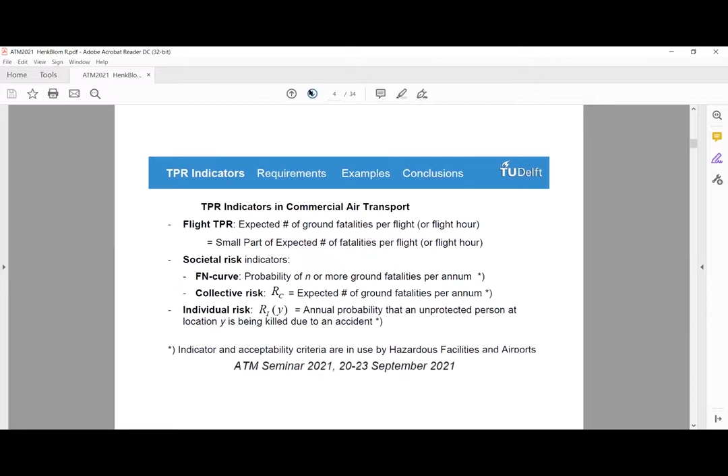It's important to see that the third-party definitions differ in some way between commercial air transport and UAS. In commercial air transport, third parties are people exposed for reasons unrelated to the flight, which implies the public on the ground. For UAS, it's the people not associated with nor deriving direct benefit from the flight, which means it concerns the public on the ground, but also passengers in another air vehicle. So if the UAS hits another air vehicle, passengers that may suffer from that in the other air vehicle are also counted as third party.

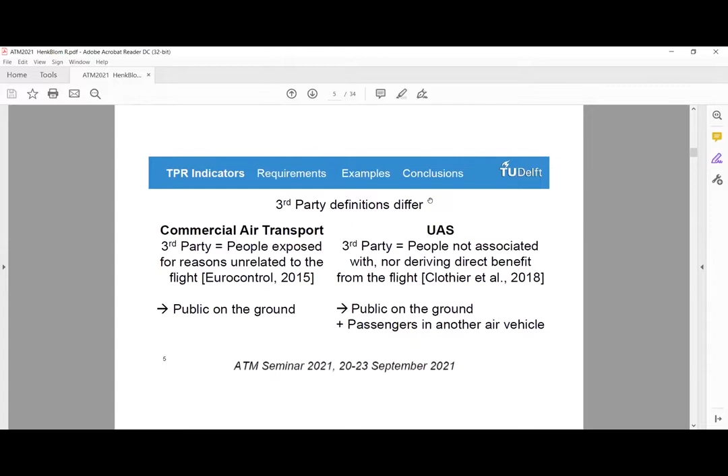Now, using this, we extend the TPR indicators from commercial air transport to UAS. And take into account that we only look now at the ground risk, not the risk that the UAS has on passengers in another flight.

So the collective ground risk per flight, I refer to this as the RC ground I from the ith flight. It defines the expected number of third-party fatalities on the ground in a given area X due to the direct consequence of the ith UA flight accident. You can also do it per flight hour by dividing this RIC ground by the duration of the flight.

I introduced these RI indicators, it looks complicated now, but it makes it easy later on. So now we define collective ground risk. That is the expected number of third-party fatalities on the ground in a given area X due to the direct consequences of UA flight accidents during a given annum. So we look at the whole year, like it's done for airports.

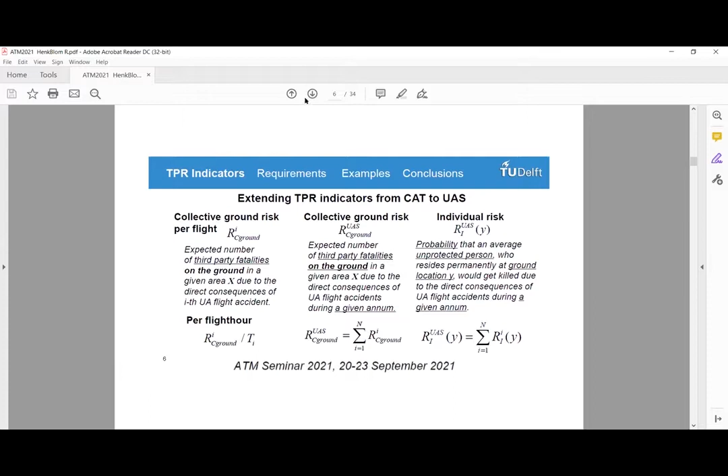Now let's look at the impact on the requirements, because you can always get things safe if you put higher requirements on the UAS operation. So first of all, we introduce acceptability thresholds for the 3 UAS TPR indicators.

In the UAS literature, they typically look at this collective risk for ground per flight, UAS flight, divided by the duration of the flight, and that must be smaller or equal to the criterion C ELOS, the equivalent level of safety. The C ELOS is then derived from how it is in current commercial operations, for manned aircraft.

For the collective ground risk, you must have this smaller or equal to the C collective ground risk, and this can be derived from the criteria used for airports and hazardous facilities. And for the individual risk, this one must be smaller than the C individual risk, which also can be taken from the regulations on individual risk for airports and hazardous facilities.

So it's clear that if you have these inequalities, these thresholds, they can be used to get requirements on the overall UAS system failure rate. I call it lambda E. That I will show you next.

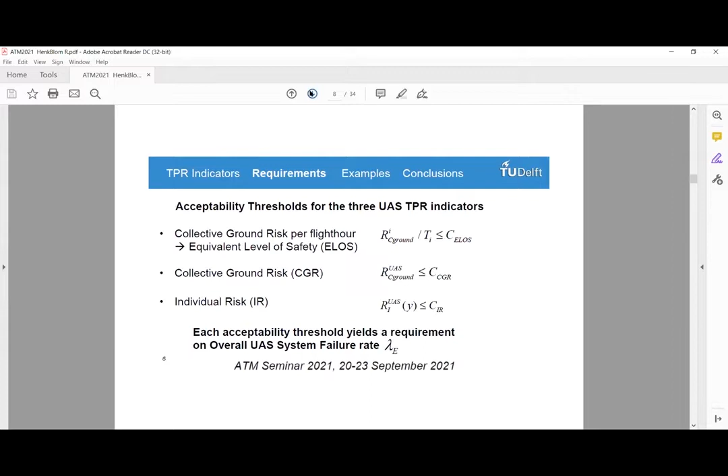So from the 3 ELOS, CCGR, and IR acceptability thresholds, we get requirements on the overall UAS system failure rate, lambda E. And there are 2 methods to do that.

One is to run a Monte Carlo simulation of a UAS operation, which has been addressed, including how to use the right models, in a recently published journal paper. We illustrated the working of it for a hypothetical UAS-based parcel delivery service in the city of Delft.

The second method is the analytical characterization for parcel delivery under model assumptions, and that is what the current paper in my presentation is about. So then you must make a number of assumptions.

One is homogeneity assumptions, for example a constant population density over the area you consider. These have always also been used by others before, like by Melnyk et al. in 2014.

Then we assume that the delivery area is a circular area around the delivery center. We have an expected number of parcel deliveries that is the same for each inhabitant of that area. The delivery flight follows direct radial paths out of the center and back to the center. And the crash center is uniformly distributed along the radial and Gaussian across the radial.

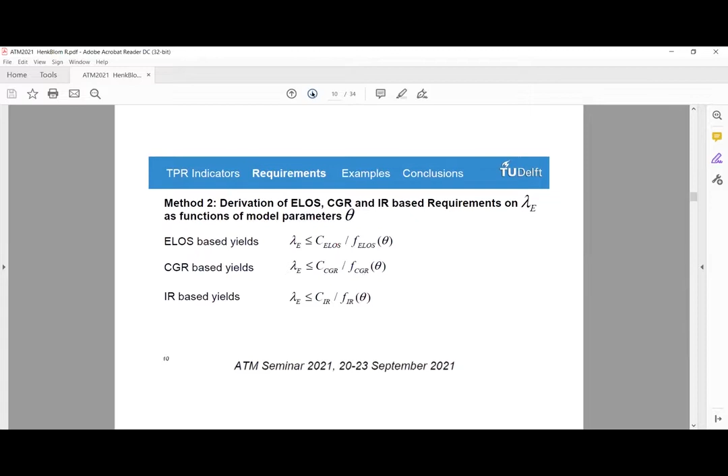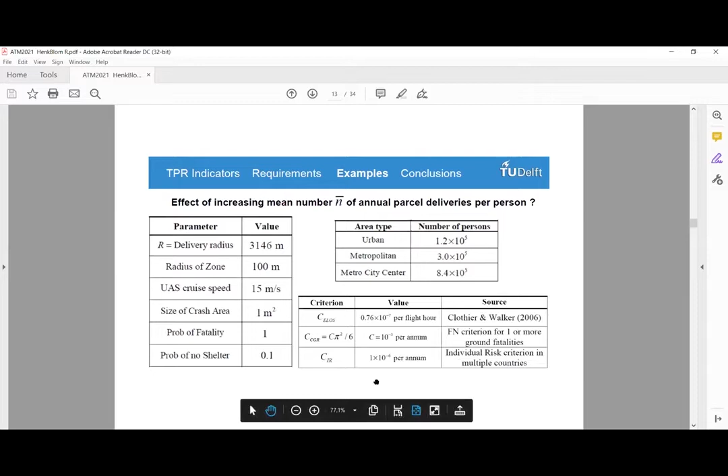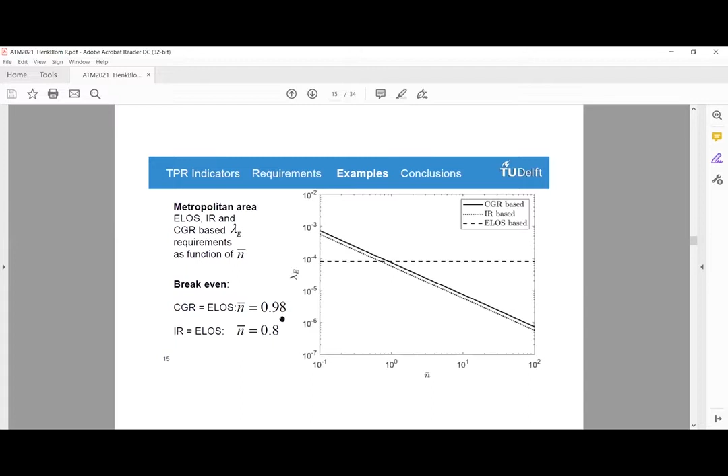Let's make another comparison. Assume that the ELOS-based lambda E requirements are posed through regulation on the UAS, and then slowly the number of parcel deliveries per year, the average, is increasing - first 1, then 10, then 100. Let's see what happens.

You have seen that the break-even point of ELOS and the IR risk is independent of the population density, so we can have the same results for any area type. Even from rural to metro city center, the next results to show always apply. The only requirement is the homogeneity assumption.

Now I also apply the Schiphol rules, interpreting them using the Schiphol individual risk criteria. If you are above the IR threshold, then no new housing developments can be done there. When you are within a factor 10 from the threshold, housing is stopped. And if you are in between, people that live there get no new housing, but they get a waiver to remain in their housing. So these are the rules applied to Schiphol.

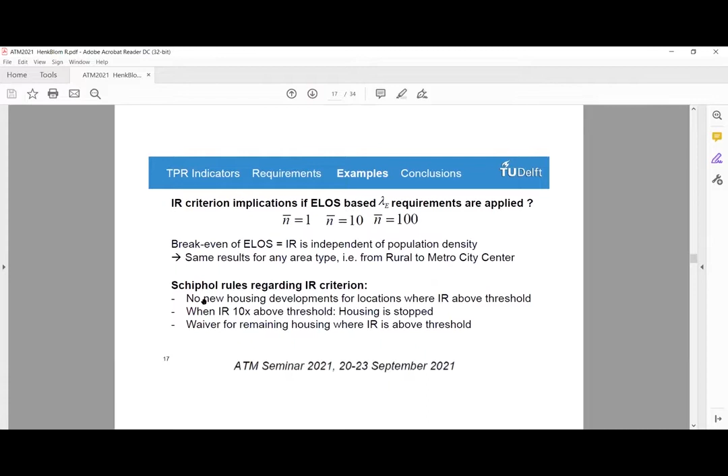Around Schiphol, if you apply these rules, it appears that the collective risk, the FN curve requirements, are also satisfied. So Schiphol mainly uses these rules together. Let's apply them now to the US situation.

We make an individual risk map for N is 1, so on average 1 parcel delivery per person per year, using the ELOS-based lambda E requirement. What do you get? You can look at the colors, but it's important to look at these circles in the middle. The smaller circle, only a dot here, has a radius of 14 meters. The larger circle, the only one not as a dot, has a range of 139 meters. In that case, 0.2% receive a waiver.

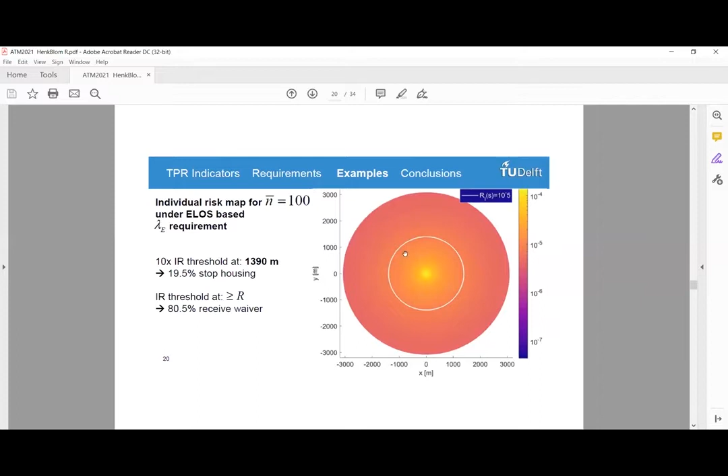If you go to the Metro City Center, for N is 100 parcel deliveries, then the whole area must get a waiver or even stop housing - 19.5% must stop new housing development, or rather, they must stop housing, so leave their house. Of course, in practice, this is unacceptable.

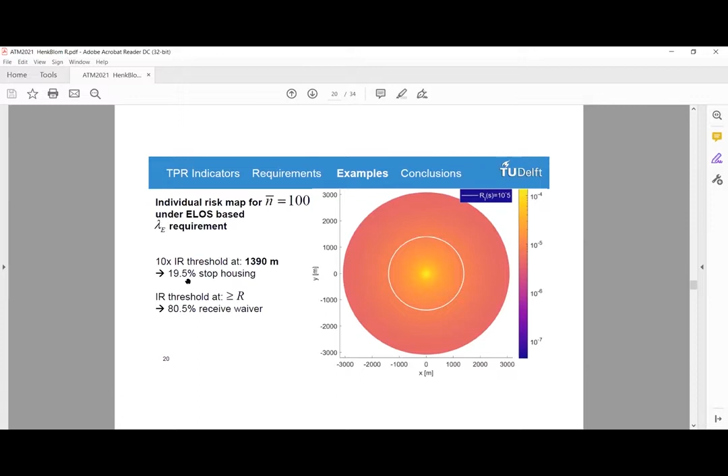Okay, let's go to the conclusions. There's an existing gap in societal issues in areas with more potential customers, and there are different ones - I only looked here at safety. In UAS literature, they have only addressed TPR from a flight perspective, while airports and hazardous facilities consider all annual flight operations. That leads to novel TPR indicators and thresholds for individual risk and collective ground risk.

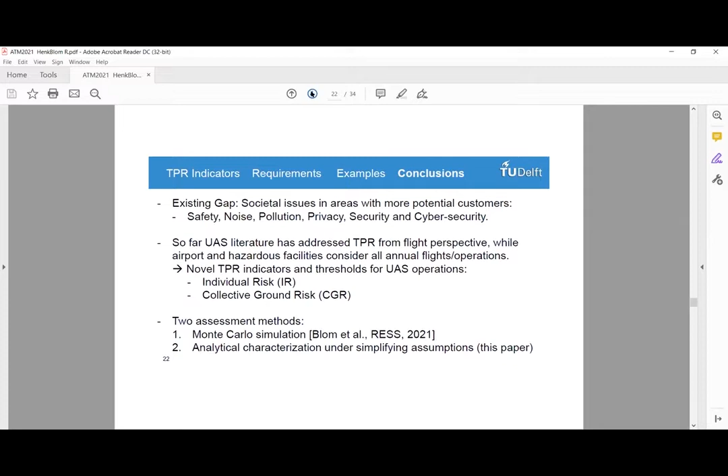We have shown there are two assessment methods: Monte Carlo simulation and analytic characterization. That analytic characterization was the subject of my talk now. We applied it to the last mile parcel delivery under 3 different requirements, with evaluated examples for urban area and metro city. You see that the break-even points are pretty low.

If you have under ELOS-based Lambda E and 10 parcel deliveries per person per year, then about 20% of the area has a too high individual risk. And if you go to 100, then the full area has a too high individual risk, and about 20% must even leave their house. So that would be completely unacceptable.

So the conclusion is that for a commercial UAS parcel delivery service involving many annual flights, an ELOS-based Lambda E requirement doesn't comply with TPR regulation that has been developed for airports and hazardous facilities.

There is follow-up research, for example, to incorporate and make explicit the ground risk of mid-air collisions between two delivery UAS, and delivery UAS with another UAS or low-flying general aviation. Then also extend the analytic approach to other types of UAS operations, for example flying taxis, medical drone services, to evaluate the TPR effects of advanced UAS support systems.

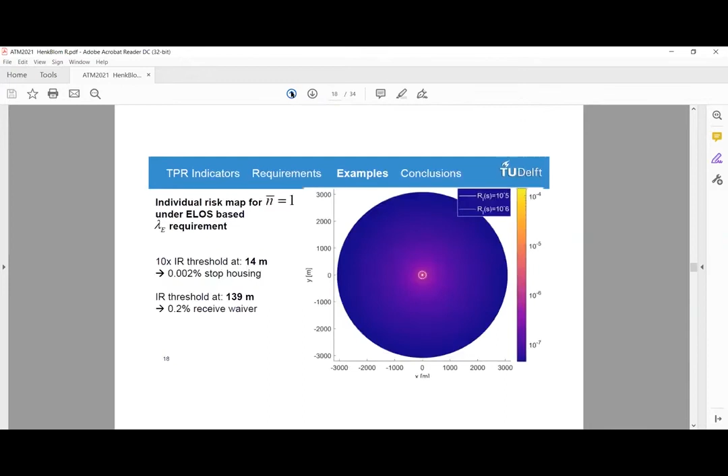These kinds of curves you can rapidly make with the analytical equations, and you can do it for all kinds of variables here. You can rapidly see what's the effect, and that's very helpful to do. If you would like to make these kinds of curves with the Monte Carlo simulation, for so many cases, it will take you a year or something. So it's very difficult to do that. That's the power of having analytical equations.

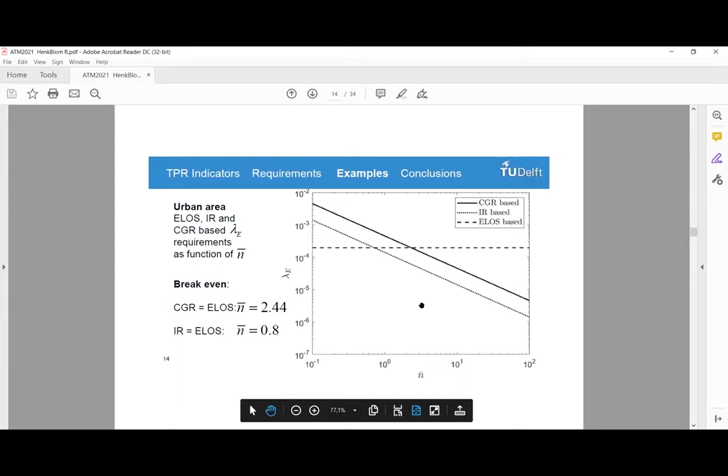Of course, then you must take into account that you have these assumptions. But if you know these assumptions, it's not so difficult to reason about it. And in particular, you can also say, okay, to understand it, let me run a Monte Carlo simulation where I do deviations from this. You rapidly can see, you get an impression of what's the effect. So it's not a big limitation, because you gain so much and you get insight so rapidly that it is impossible to get at that scale from Monte Carlo simulation.

I think you answered the question that was posted in the Q&A kind of in passing, where the question was to compare the strong points and the weak points of the Monte Carlo simulation as opposed to the analytical method that you've presented here. And I hear you say Monte Carlo is more precise because you can loosen some of the assumptions, but you run lots of Monte Carlo simulations that's quite numerically intensive and takes you a much longer time.

Coming back to your assumptions and the assumption of permanent residency that you assume for the individual risk, is this also an assumption for the collective risk assessment? And do you have a feeling for how much you overestimate the risk if you assume permanent residency?

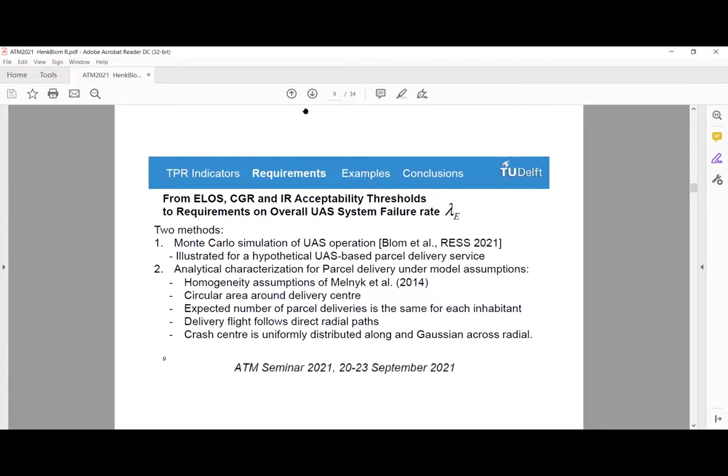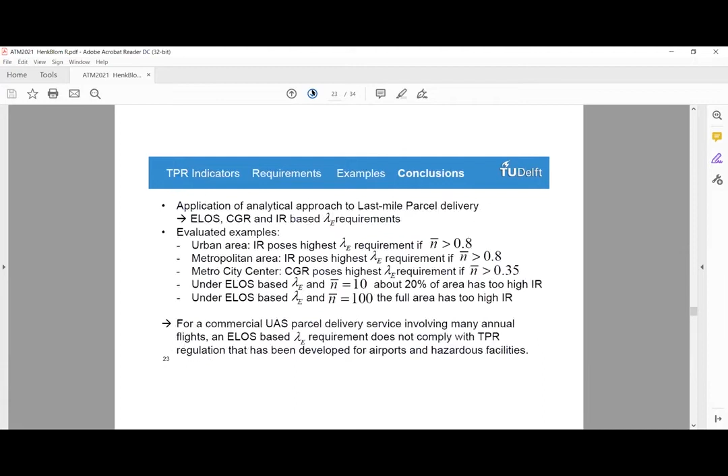The main thing I see is the follow-up, because once you start working on this for a while, you get insight into things where the submodels are currently weak. One of them is the probability of fatality. I've focused with another PhD student, and now continued with Shengpeng, the co-author of this, on this point, and we find really surprising things. For that, we use multi-body system models so you can exactly see where the drone hits the human, which can have a lot of influence on the probability of fatality.

And is the geometry of the drone, how are the assumptions taken into consideration? Because the size and mass of the drone, and its behavior, will have an impact on how likely it is that somebody on the ground is hit, not only the population density but also the pure mass of the drone. I assume you have to make certain assumptions there. For this probability of fatality model, developed with another PhD study, the drone is well modeled in a multi-body system model, so all the different parts of the drone are separately modeled.

And which assumptions do you make about the population of drones that will be flying? How many, or which percentage of class 1, 2, or 3, or how heavy are the drones? What's the distribution of heavy versus light drones assumed in your calculation? For the extension of the probability of fatality with the multi-body system, you are already happy to have a proper multi-body system model for the drone and the human per drone type. To have them all will take some while, that's for sure.

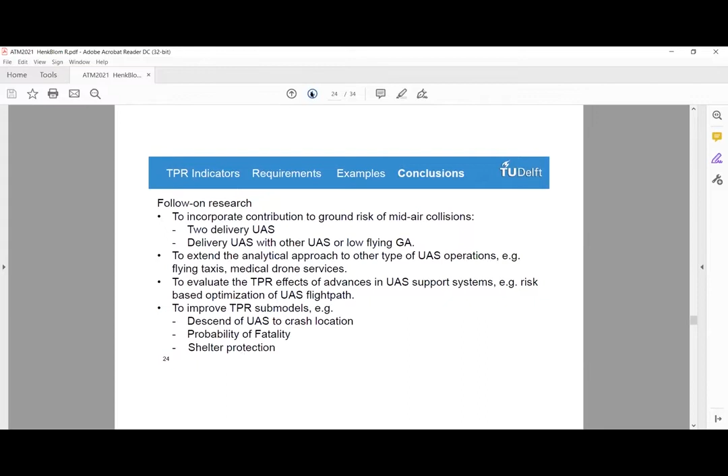That gets very complex. My last question, Henk, is which third-party risk indicators are presently used in existing regulation, for example EASA or the FAA itself? I have a few reserve slides and I can show you what I have here.

There's a table showing what EASA SORA is doing, EASA SORA for AMC APAS, then the FAA AC, the FAA order, and an SMS manual. If you look at the FAA SMS manual, it looks at all the types of contributions.

I can show you the fatality types. It has to do with whether you're looking at persons on the ground, fatalities on the ground, or persons on board, and also what type of accident - is it the UAS crashing to the ground, or the UAS hitting something else that then crashes to the ground, etc. There are many combinations; I can show you on a slide back, and there's also a paper we published 1.5 years ago, a conference paper. You see that the FAA SMS manual addresses all these cases, but from the single flight perspective, not summation over all flights in a year.

If you look at the specific developments at FAA for the US, you see that they focus only on the things on the ground, and not the other ones. In EASA, similar—you see the focus on this one, with something on board to take into account for the certified category, similar to how they currently certify commercial aircraft. That's pretty good. For light certified, the ground risk, they have special rules added for it. And for SORA, they also address this, but it's very qualitative—it's difficult to get a quantitative hold on what exactly it's doing.

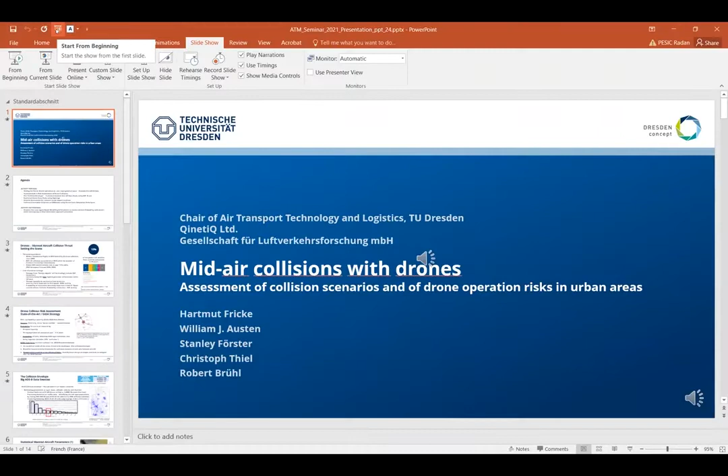Dear Mr. Chairman, thank you for giving me the word. My talk about mid-air collisions with drones is a joint work of TU Dresden, QinetiQ Limited located in Great Britain, and GFL, a university spin-off company located in Dresden. I have the honor to present this work on behalf of my colleagues William Austen, Christoph Thiel, and Robert Brühl. My colleague Stanley Förster will later join to present the use case findings.

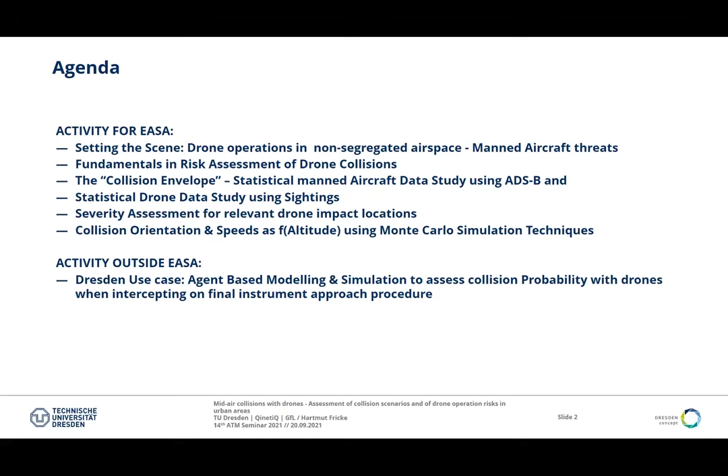This talk will be twofold. The first part covers investigations on drone collisions with manned aircraft regarding probabilities and severities of potential collisions, depending on the selected impact scenario. The second part uses our agent-based modeling and simulation environment from TU Dresden to apply the data generated in the first part to an urban use case scenario around Dresden Airport, where commercial transport operates in close vicinity to simulated passing drones. I should point out that the first part is an activity endorsed by EASA, the European Aviation Safety Agency, whereas the second is a TU Dresden-led research activity.

So let's set the scene. You may wonder whether the topic of collision risk with drones is really worth studying, right? One might think that drones typically fly at low altitudes, a few hundred or a thousand feet, so commercial air transport should generally be safe. But let's look into statistics—these tell us this is really a growing problem. In pre-pandemic times, global traffic performance was around 69 million commercial flights in 2019 alone, recorded by ADS-B data receivers.

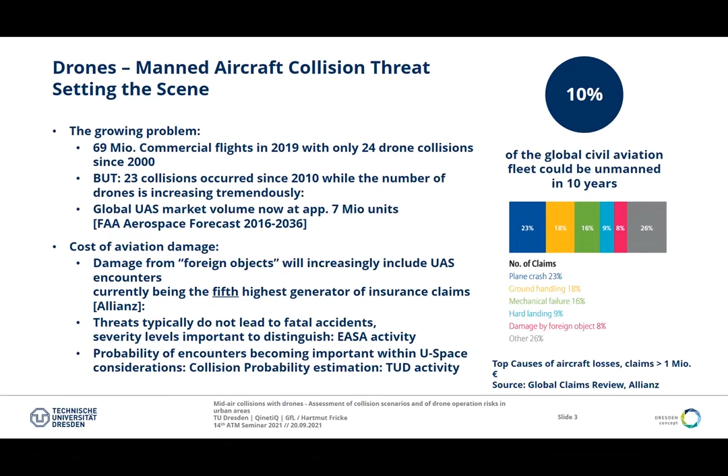Let's have a brief look at the state of the art in drone collision risk research. Basically, we can recognize that all research considers severity of drone crashes as what we call worst credible, clearly overestimating the computed risk. We do so far the same.

However, as for the probability, we found that all models rely on airspace capacity figures, a given throughput, and, if applicable, the applied separation between the flying units, following, for the case of aircraft, ICAO definitions, or if not applicable, in a VFR rule environment, using subjective linguistic variables like stand clear or stand well clear from each other, as we know it from VFR operations.

With the inauguration of a so-called drone collision task force by EASA in 2016, a set of recommendations came along calling for these missing model pieces, such as an analytical model of drone threats and a hazard severity threshold model to deepen the understanding of the effects of mid-air collisions between drones and manned aircraft. And this is exactly what this paper tackles.

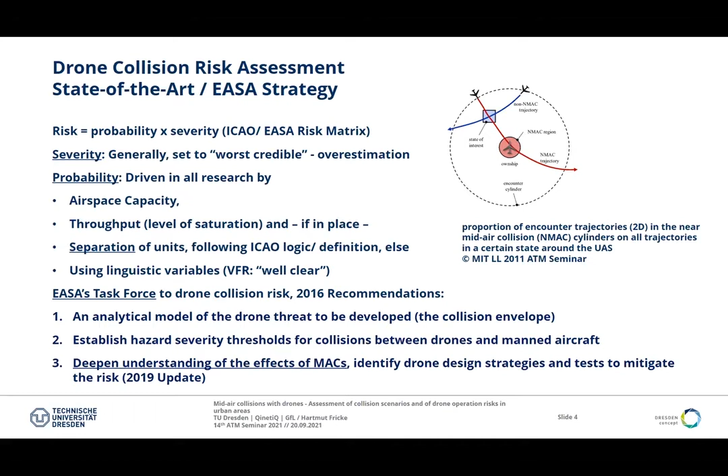On the right-hand side, this is just an excerpt of a typical encounter model, published in 2011 by MIT Lincoln Lab in the ATM seminar. Here, risk probability is calculated as a proportion of trajectories in the near-mid-air collision (NMAC) cylinders in all trajectories in a certain state around the UAS. So separation is the main driver of computing the risk.

To assess in detail the severity and probability of drone collision risk, we introduce the term collision envelope, concluding all parameters related to an impact. These cover, of course, typical kinematic parameters such as aircraft type, aircraft mass, operated altitude, speed, but also daytime.

This allows us to more precisely relate statistics to, for example, sunrise to sunset periods to reflect typical drone operation behavior, or, as we'll see later, scenarios where we limit wind speed and other factors. We will create scenarios at the end using these parameters.

The flight level 120 altitude boundary is considered to conservatively cover all typical consumer-prosumer drone operations and is based on statistical evidence. This vertical band was finally reduced to flight level 30 in follow-on activities, as our use case explores urban area safety considerations. But here we start with the flight level 120 band limitation.

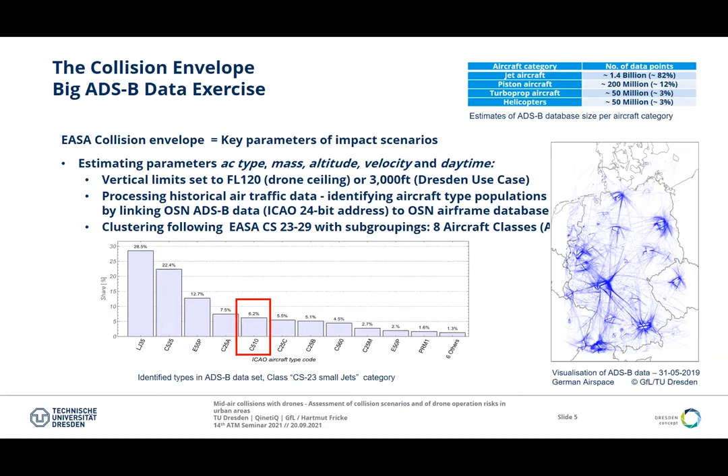ADS-B data contains the geometric altitude above mean sea level, as reported from GNSS sensors. However, drone operations are typically reported or related to height. So to derive the height above ground, information about the topography, the elevation, is required.

So we use a specific geometric algebra to identify the night and day shift times and located it to each grid point of the dataset.

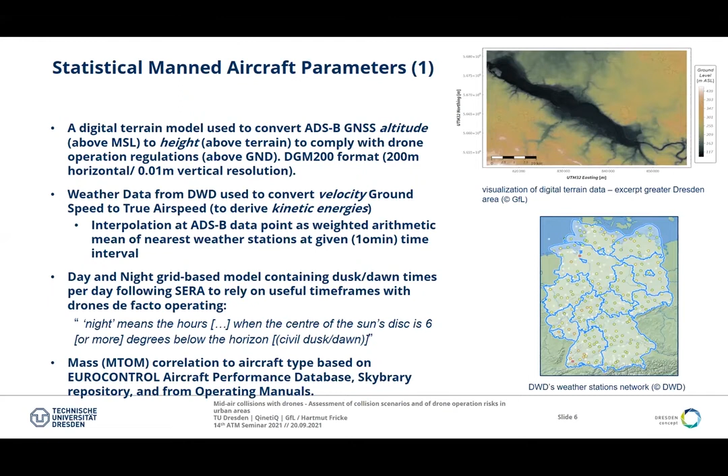To relate the aircraft classes and aircraft examples found in the previous step to the different speeds, we computed those for all 8 aircraft classes for a total of 30 randomly selected days, from which all data points were taken, but per aircraft class not more than 100,000 per day.

After the selection process, the GNSS altitude given in the ADS-B data was converted into height above ground for each selected data point using the digital terrain model, and the aircraft type was matched from the OSN airframe database using the reported ICAO 24-bit identifier of the onboard transponder.

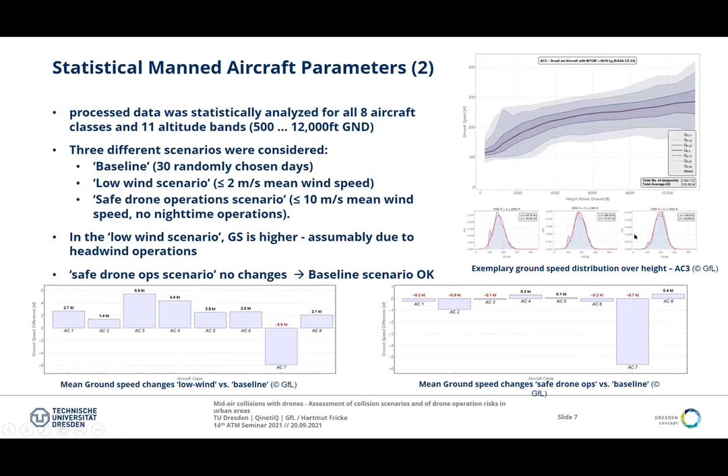For all classes, we can state that the statistical analysis showed expectable behavior for all 8 aircraft classes, with mostly increasing ground speed with increasing height or altitude and main aircraft size.

Now let us look at the drones. We described how the probabilistic distribution of aircraft ground speed was calculated as a function of altitude. This provides an evidence-based justification for the speed of different categories of aircraft during low altitude phases of flight, rather than relying upon generalized performance figures.

When considering near-mid-air collisions, we introduced already the term NMAC with drones, the relative velocity of the drone and the aircraft is the second most relevant risk trigger, obviously, dictating the kinetic energy.

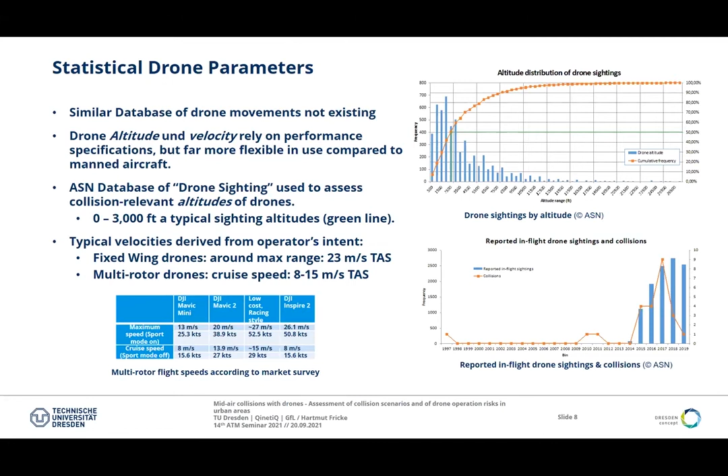So before doing another step, to compute the collision risk combined, we first check again the severity aspects of such collisions as introduced in the beginning of the talk. Local manned aircraft target identification, meaning where the drone hits the aircraft, will strategically involve finite element model simulations and testing of collision scenarios.

That's obvious, and this is going to be covering the next steps in the vulnerability program of EASA. But for the first hand, it would not be practical to consider impacts against all potential impact sites on each aircraft class, because this would lead to a huge number of possibilities. So we instead prioritized the local impact zones of interest, and a list of candidate impact zones like windshields, propellers, leading edges was created based upon outputs from EASA's Drone Collision Task Force and other studies.

For each example aircraft identified per aircraft class, as you remember from the first part of the presentation, these zones were then evaluated against criteria: the relative probability of the feature being impacted, the perceived vulnerability of the feature to impact and damage, and the criticality of the feature to the safety of the aircraft and its crew and passengers, through workshops and offline surveys.

The conditional probabilities assume that a collision has occurred and considered the relative probability of each of the candidate impact zones being struck. Vulnerability of the impact zones, and the ability to withstand an impact without failure, was based upon expert opinion and evidence, allocated to a 3-level determination process: high, medium, low.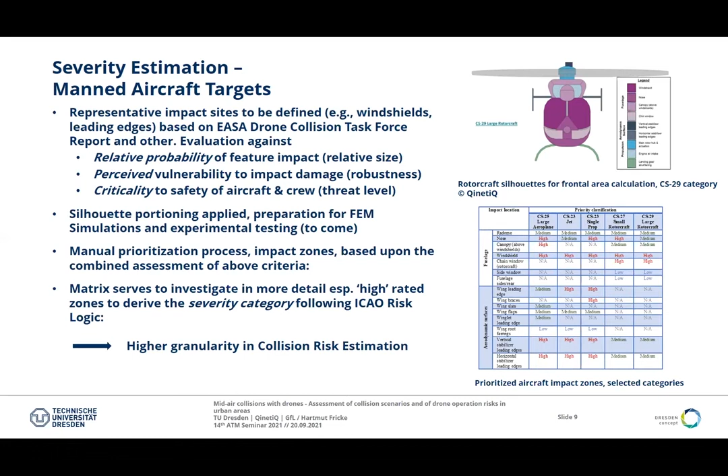With that list, also represented by a helicopter silhouette on the previous slide, we can now, depending on the scenario modeling, assess collision orientation and speeds using that granular classification per scenario. However, we do not use yet all of these collision envelope parameters in this paper, since we limit ourselves to purely head-on conflicts as sketched in the right upper figure. So basically we could consider different angles on the lateral and vertical plane, but for this paper we stick to head-on conflicts only.

For this setting, then we compute the collision speeds in a Monte Carlo simulation. It was used to combine the manned aircraft flight data for altitude results with the drone sighting and collision data. This assumed that the distribution of mid-flight drone sightings is representative of near misses, which could equally have been collisions in less fortunate circumstances.

So the data generated for various quantiles and per aircraft class are listed in the table you can see on the lower part. And the probability density function shapes on the right graph show the link of the different quantile values, and document that the cluster concept seems to be useful, since we have specific and well-distinguishable speed distributions per aircraft class found and presented here on that figure.

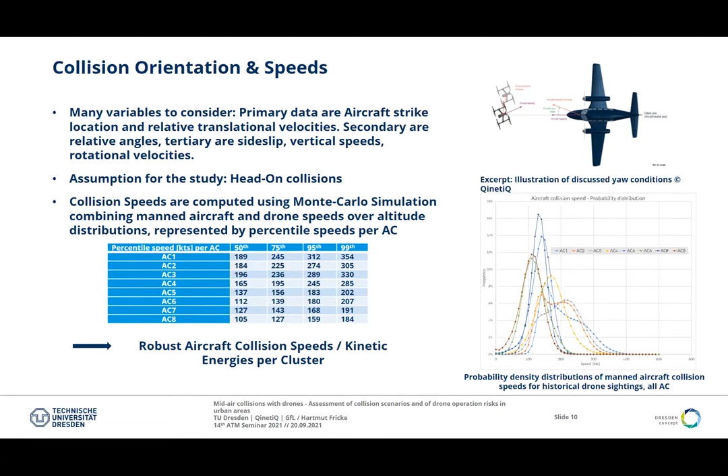With that, we are actually now ready for a use case to estimate the collision risk, applying collision speeds per altitude in a setting for the city of Dresden, as indicated in the beginning, focusing on the airport surroundings. And this is what my colleague Stanley Förster is now presenting. I'm handing over to him.

Based on the findings presented so far, we set up a scenario to investigate the collision risks between drones and manned aviation aircraft. For this purpose, we utilized an agent-based fast-time simulation environment which has been developed at our institute for over 10 years now.

It constitutes a framework that gives the possibility to set up arbitrary route structures and airspace elements, and furthermore, the framework provides several agents that behave stochastically and interact with the airspace structure as well as with each other. This is especially helpful to investigate emergent effects that are not obvious at a first glance.

The most important agent entities in our scenarios are the airspace users. This includes aircraft and now also drones, which have, for instance, navigation tolerances or variable speeds attached, but also the pilot and ATC agents who mimic human behavior, especially in terms of stochastic delay according to reaction time distributions.

Depending on the requirements of the scenario to implement, we also have modeled surveillance infrastructure like radar as an agent to communicate aircraft position to ATC with resolution and accuracy following a probability distribution as well. Finally, we can also model limited communication capabilities due to the number of radio channels available and the speed of the spoken language together with phrase length.

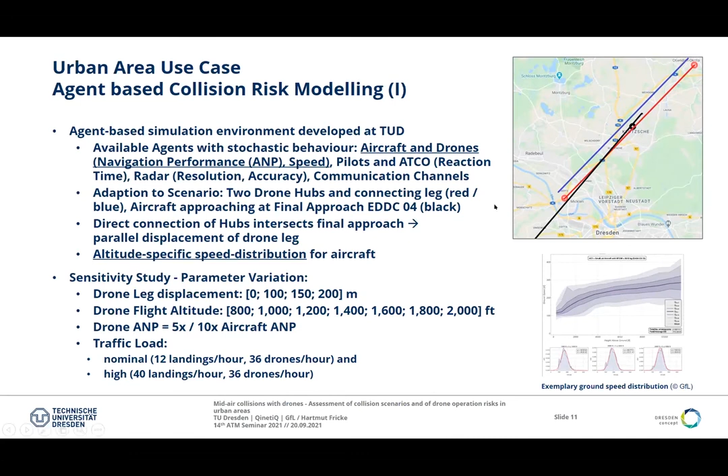The results of these simulations are depicted in the diagram to the right, where we see the collision probability per hour for each of the 112 scenarios. What's quite obvious is that the influence of the traffic load, which is depicted by crosses for nominal and circles for high load scenarios, is very low. So the nominal scenario has still a little less collision probability, but the difference is quite insignificant.

Therefore, we can conclude that the idea, for instance, to limit drone traffic in favor of no-fly zones may not be as effective as expected. Second, we can observe that the lateral or vertical separation of drone and aircraft flight legs are the most significant countermeasures to enforce safe operation.

What's however most interesting is the observation that for scenarios where the drone leg and the final approach are very close together or even intersect, see for instance those blue dots, the probability of collision is higher in case of higher navigation performance. This is called the navigation paradox, where high navigation accuracy leads to high concentration of traffic along the intended flight leg, but therefore also to a high concentration at points of intersection and thus a higher collision probability. And the effect of traffic dispersion in case of lower navigation accuracy then also leads to lower collision probability in these cases.

Finally, we see that the overall collision probability in our scenarios is relatively high, but we did not yet consider the impact geometry and severity of such events, but imply a fatal collision in every case instead, when however the majority will be of limited impact depending on the impact parameters.

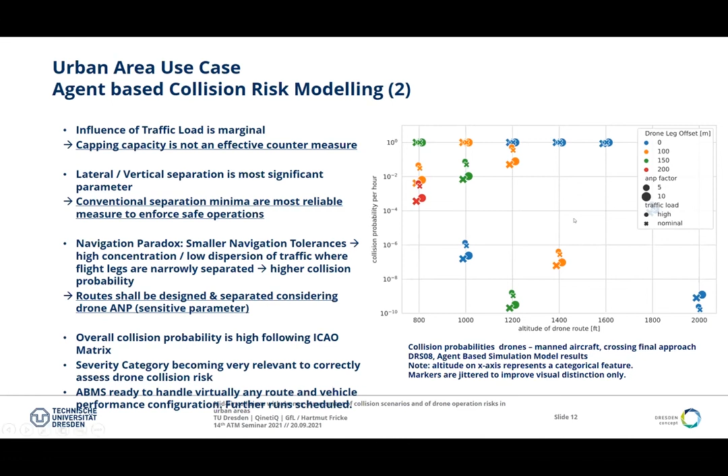So with that said, for the use case, let me conclude the talk on the major findings we can see so far. We had performed the big data exercise based on ADS-B.

Including fusion of multiple unrelated data sets, as you saw, it's about the terrain model, the wind data model, and much more, to provide a probabilistic assessment of potential collision speeds. This was coupled to identify common aircraft types and exercises to define what we call a collision envelope - driving parameters per impact scenario to provide a robust foundation for ongoing activities, evaluating collision scenarios by validating modeling and test in a major European research program led by QinetiQ and awarded by EASA.

TUD used the data to assess aircraft drone collision risk using an in-house ABMS tool already used in other EUROCONTROL studies and ready to consider more detailed drone collision severity models. Important to see the outcome that Stanley was presenting.

The probabilities we computed are as high as 0.9 times 10 to the 0, so 90%. We are close to 1, which is a very surprising outcome, and it tells us it is all about separating drones from aircraft rather than arguing over capacity constraints or throughput limitations.

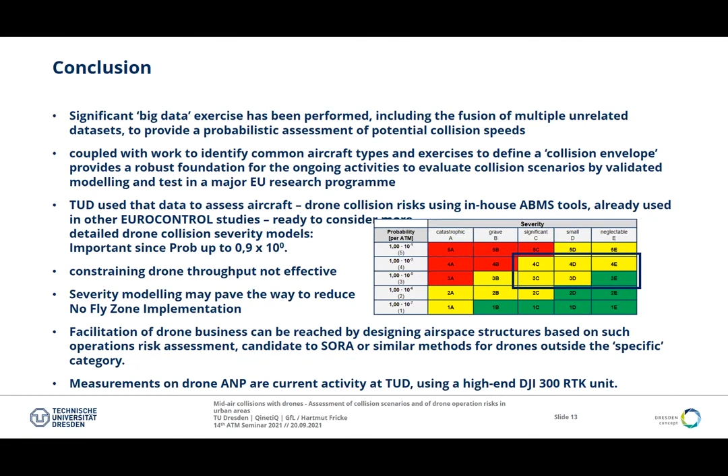Thank you very much, Hartmut and Stanley. It's interesting you said this is a 28-minute presentation, but it took 33 minutes to play on Radan's computer. So I guess we should get Radan a new computer to speed up our sessions. We have time for a few questions, and I encourage you to type your questions into the Q&A.